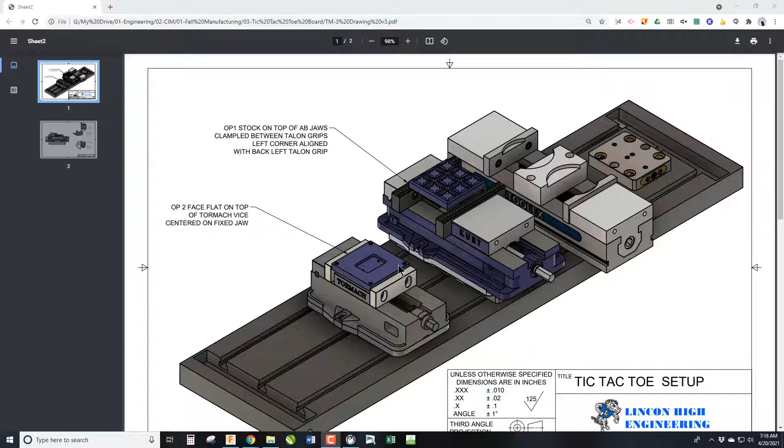Okay, to set up the tic-tac-toe board, you obviously need to model your tic-tac-toe board. You're going to need this file, found on Schoology, which tells you the important information about how to place the board on the vises.

And then, of course, you're going to need this file, also on Schoology, for you to download and import into Fusion so that you can then place your tic-tac-toe board into the two vises, the Kurt and the Tormach vises. So let's get started.

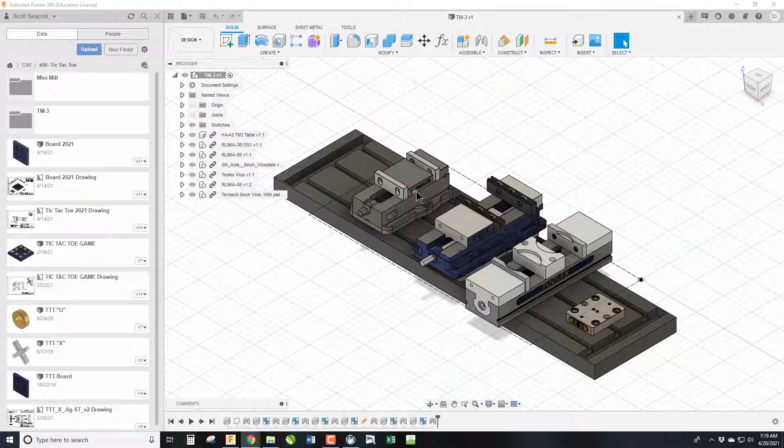Let's get started. So this is a model of the TM3, the Haas. This is a model of our Haas TM3's table with all the vises that we normally keep on it for all the projects that we do.

So we are going to put our model into this assembly and then do all the CAM programming for Op1, which will happen on the Kurt vise, and Op2, which will happen on the Tormach vise.

So you're going to need to download this off Schoology and then upload it into Fusion, and it should come all put together. You are going to want to create its own folder, because if you open this up, there is a whole bunch of separate parts, and you don't want that to clutter up your tic-tac-toe folder.

So I would create its own separate folder, and then you can go into this folder and you can open the one that says TM3.

And then now we're going to go ahead and just right-click on the board. This is the most current board, and I'm going to place it into the model, and I'm going to click OK.

My board has all the X's, all the O's, and the feet, but I've turned all those off so that we're only working with this.

So the very first thing we need to do is essentially join it to the vises. We're going to have to ultimately make a copy of it because we're going to need one for Op1 and one for Op2.

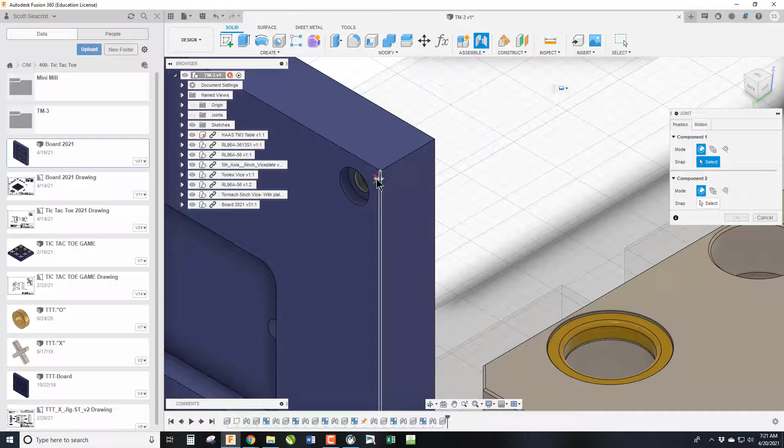So we're going to first go on the keyboard here, J for joint, and I am going to select the bottom back corner of the board. And then I'm going to select the outer edge, top edge of the jaw that we're going to mount it on. Op1 is done on the Kurt vise.

When we actually set it up in the machine, this talon grip will become flush with the side of the vise. So we need to offset this up and to the left, and we also have to go, I guess we should...

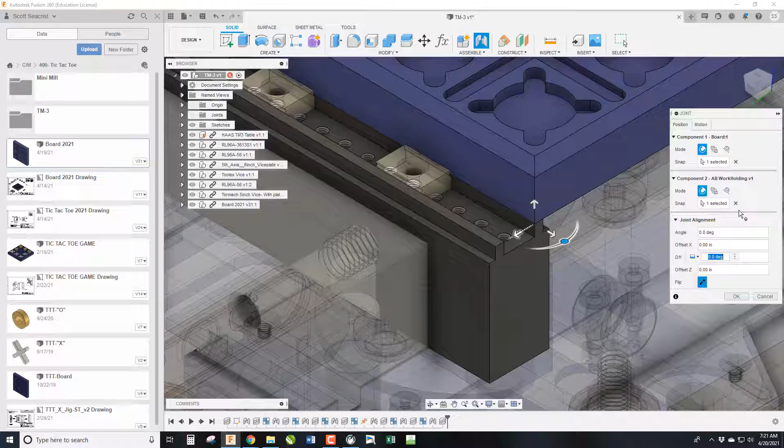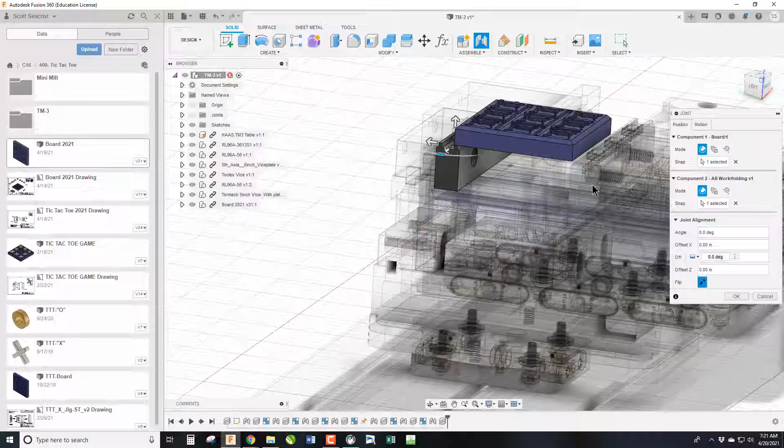So this is going to offset both down in Y, to the positive in X, and it's going to have to come up in Z. And all this data that you're going to need is found on this sheet here.

So if this is Op1 here, it's going to be 0.06 back from the corner, 0.18 up, and then we have a 1.378 from the left-hand side.

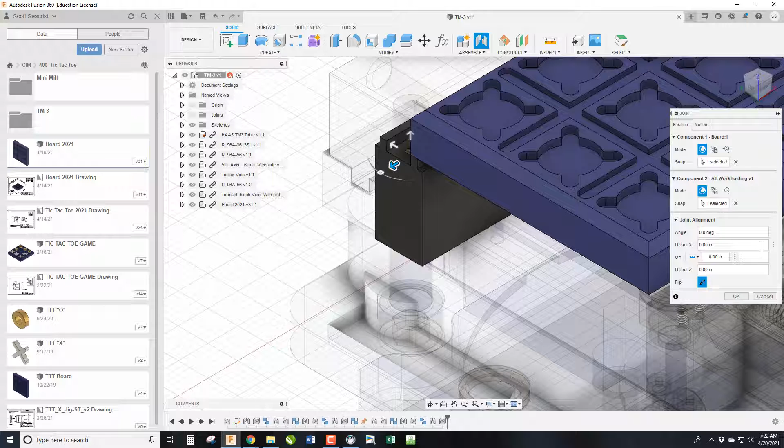So let's go ahead and do that. It's going to be negative 1.3. For this one it's going to be negative 1.378, and then the up one is going to be 0.18, and then this one will be negative 0.06. And I know the negatives because the arrow is pointing away from it.

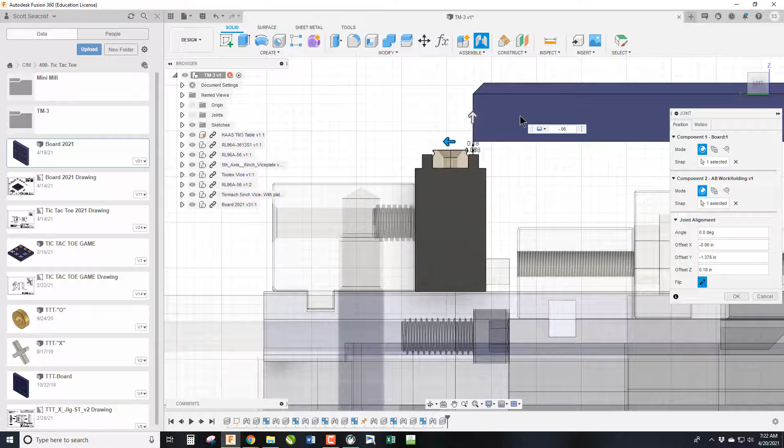And if we look closely, we can see that there's now a gap. And what this will do when we get to the next step of the setup is the 1-inch stock should then be resting right on top of these little edges.

So we're going to go ahead and click OK. I'm going to go ahead and hit Control Copy and Control Paste, which now means there are two boards right over the top of each other. And oh no, they're not right over the top of each other. My mistake, one's over here.

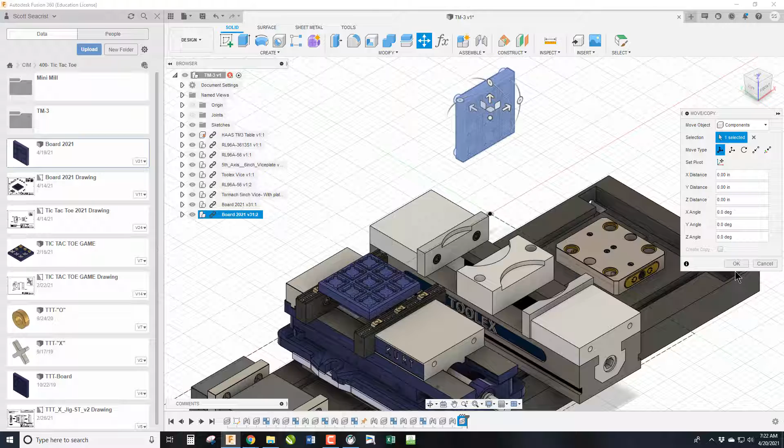That's perfect. And then we're going to go J for joint, and we need to kind of flip around to the back side to make sure we get the pocket in the correct spot, which we do.

And I am going to select the top edge, well, what will be the bottom edge, which will become the top for this. And then I am going to select the front of the vise here.

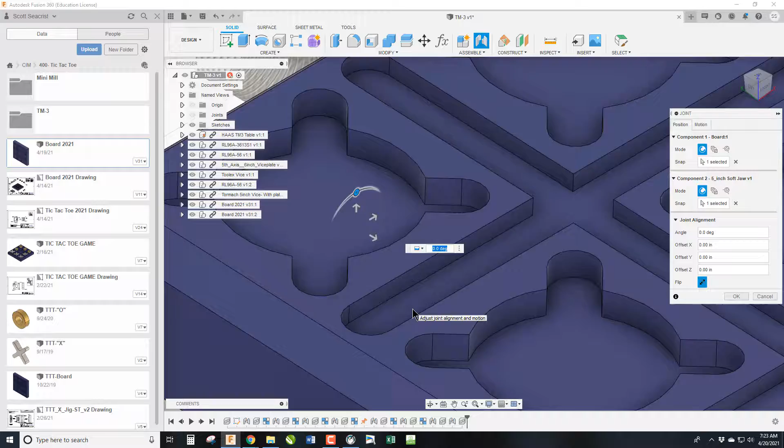And we're going to hit a flip. Oh, nope, not a flip, my mistake. We're going to rotate it 180 degrees.

Now, that's obviously not where we want it. If we go back to the drawing, Op2 is down here, and it's saying from the top edge here, it's 0.29 up. And...

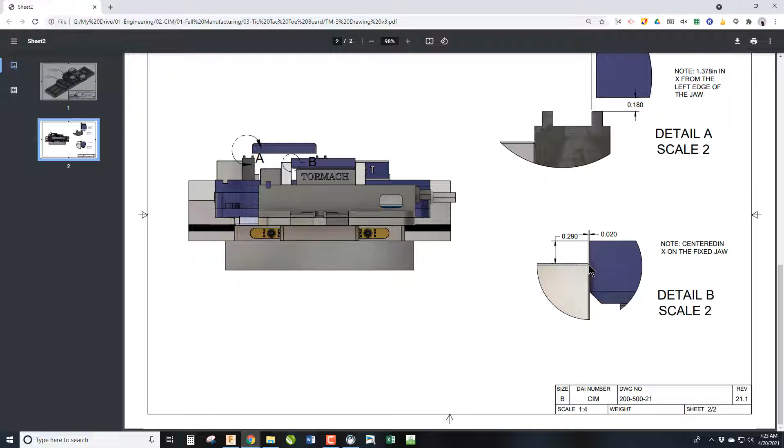Okay, I did this wrong. So here's our board, once we pasted it, it came over here. We're going to go J for joint.

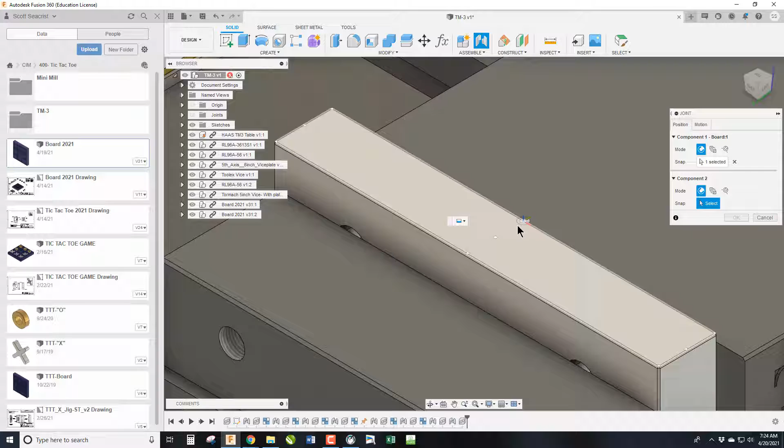And the best way to do this is we are going to select this surface, center of the back, or the bottom, I'm sorry. And then we're going to select the top of this and bring those together. We're going to hit a flip, and then we're going to rotate it 180 degrees.

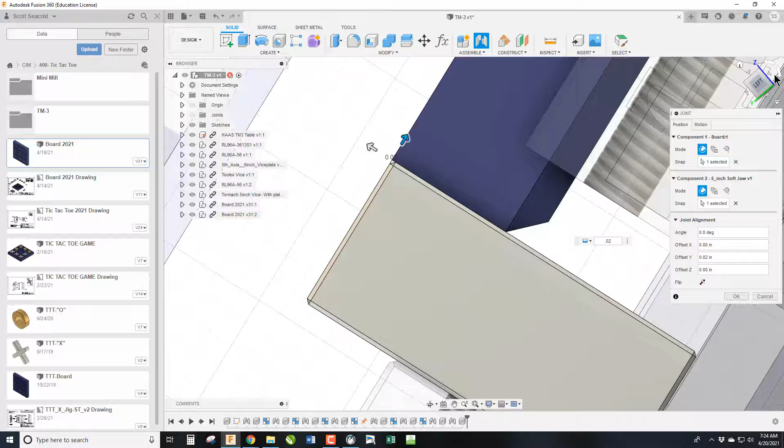Now, we need to move it 0.02 so that it will align with the actual jaw, overcoming the chamfer. And then we are going to rotate this, and you notice we have a big gap here because it's actually sitting inside the movable jaw, but it's 0.29, and that'll produce a perfectly flush movement.

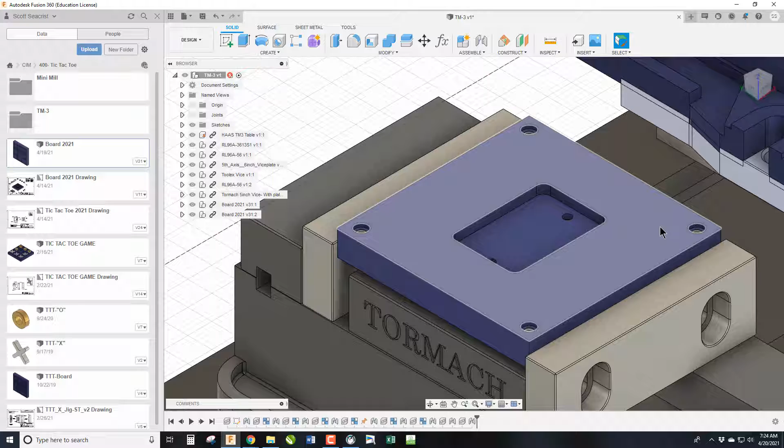And then when we set it up, we're going to make sure that the board is flush on each side, left and right, when we put it together in the actual jaw. So now we have both Op1 and Op2 placed on our model.

So now we need to do a setup. So we're going to hit save so we don't lose this.

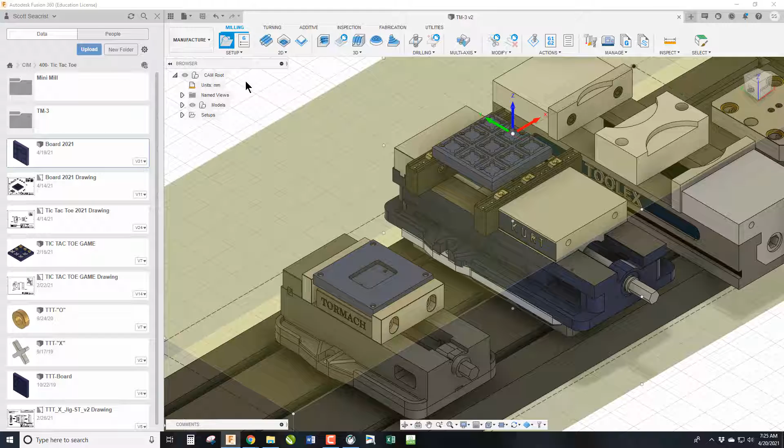And then we're going to go to design, manufacturing, and we're going to do our first setup. So it's going to want to grab the whole thing, which is not what we want. We want it to just be one piece, so we're going to click on model, and we're only going to select it one of two ways. We can open this design tree and then just select the one board we're going to use. Oh, shoot. Okay.

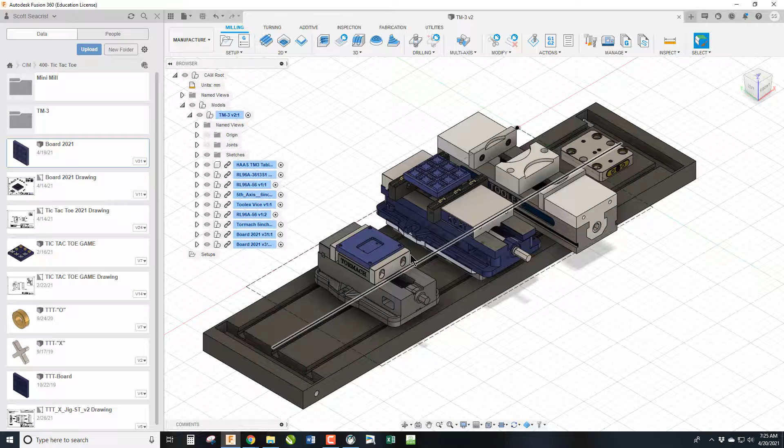Okay, so we now have imported the model, but what we have to understand is all these parts are actually all present. And if I move just the board, the O's and the X's will stay behind, which will cause us a downstream problem when we start to do the setup to actually do the manufacturing. So the first thing I need to do is make this board what's called a rigid group, which means all the parts will move together, even though I have some of them turned off.

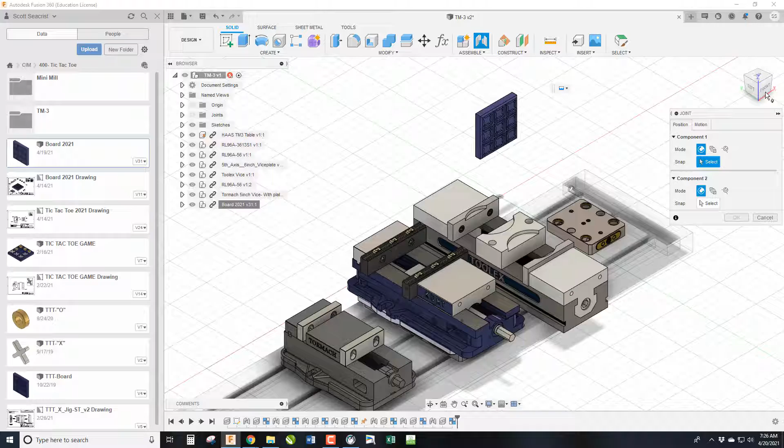So I went ahead and made this a rigid group. I can now go J for joint, and I am going to grab the bottom corner, outside corner, and I'm going to set it on top of this outside corner. Now, that's not what we want.

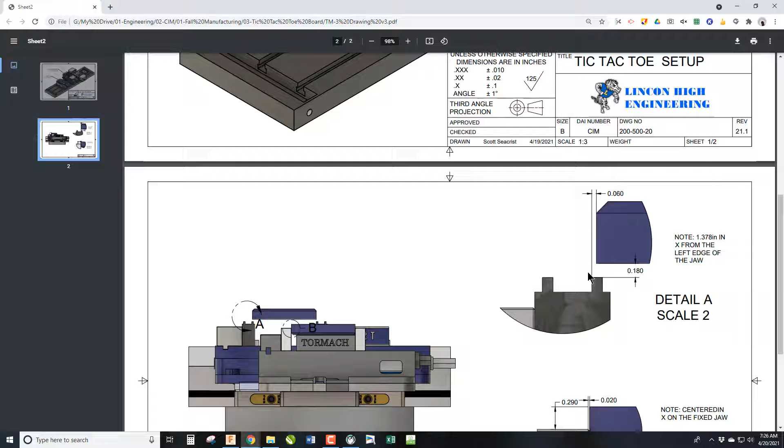If we flip over to the drawing, it tells us some details here at the top: it's 1.378 offset from the left side of the jaw, it's up 0.18, and it's offset back 0.06. So if we come over here, we can do those, because the arrow is pointing the opposite direction I want. It's a negative 0.06 for me, negative 1.378, and then it is a 0.18.

And that will account for, which we'll show in a few minutes, the stock being placed in there as well.

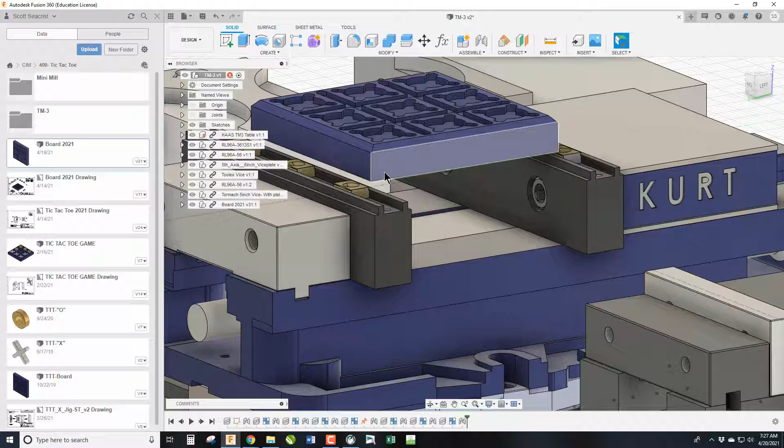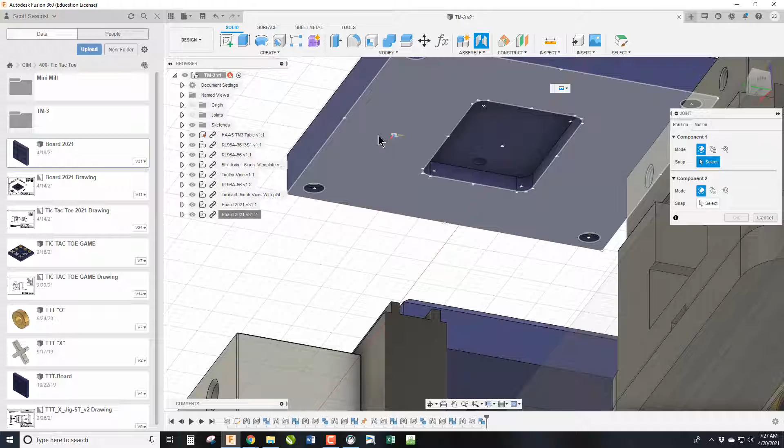So the next step we're going to do is Control Copy, Control Paste, and now we have two of them. We're going to move that one up. Once again, we need to do a rigid group here to make sure we move all the X's and O's with us. And then we are going to go J for joint, and in this case we are going to choose the bottom here and the top of this there. There we go.

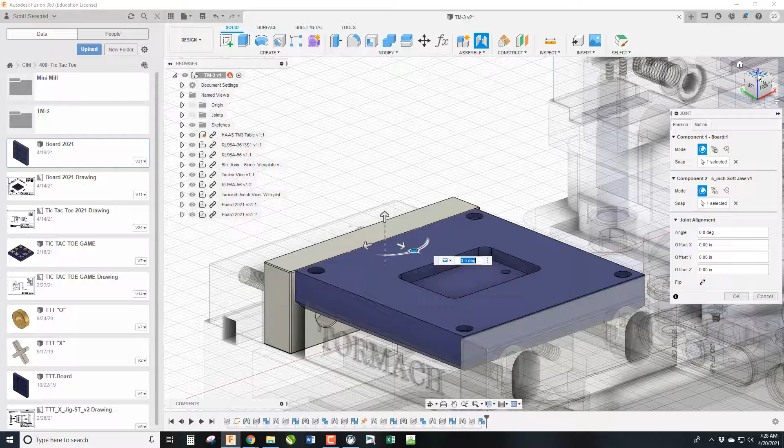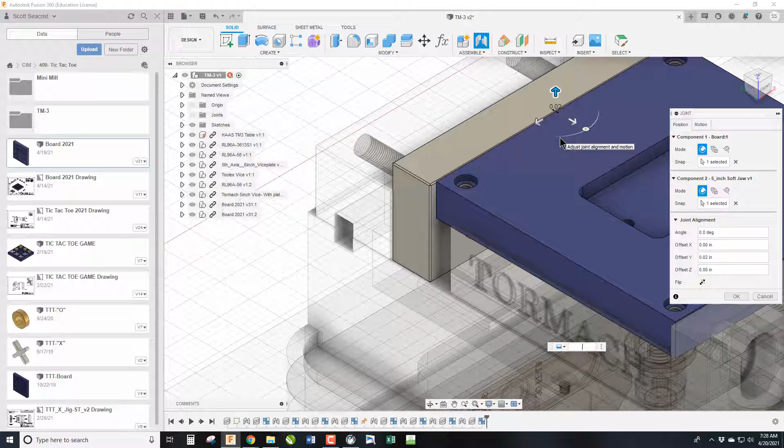Now we're going to flip this over and rotate it 180 degrees to get it into the position we want. Now we need to account for the fact that there is a chamfer on this soft jaw, so the first thing we're going to account for is a 0.02 chamfer, which overcomes that. And then the next thing we got to do is bring it up. In this case, we're getting this information from the drawing down here, and we are going to go 0.29 up, and if we then look from the side, it's perfectly flush.

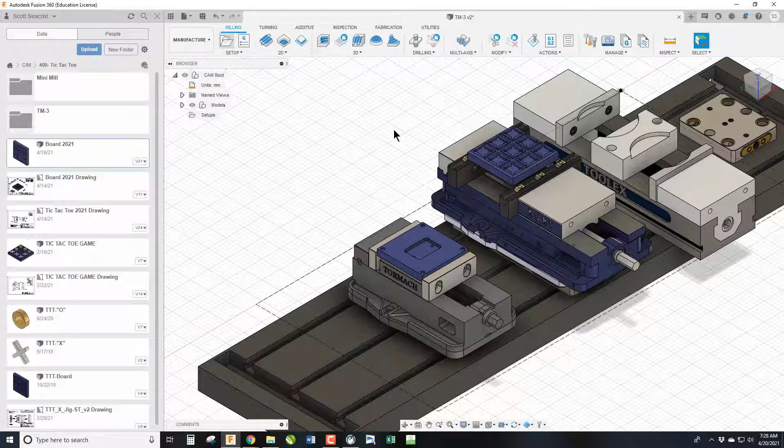And there we go. So now that we have both models placed properly, the next thing we're going to do is go over to the manufacturing side. We are going to go setup, and it's going to try to do a setup for the whole part, which is not what we want. So the first thing we're going to choose is just that one piece, and then our orientation is actually correct.

And then we're going to go to stock, and it is a fixed size stock. And for some reason I'm in millimeters, which I don't know why inches isn't set as default, but there it is. So we got to go back to setup again.

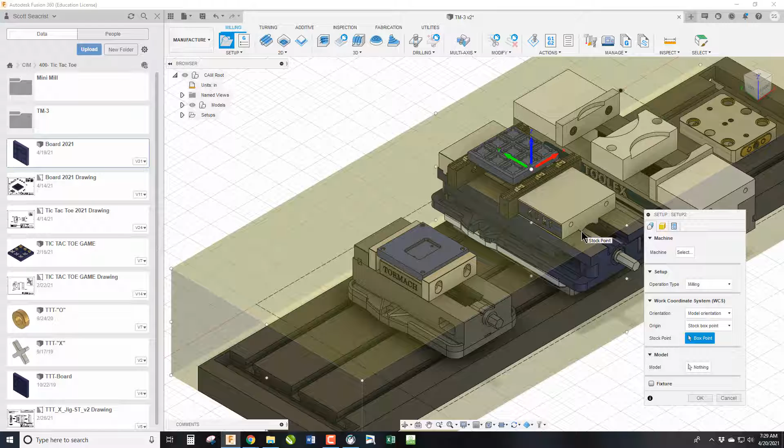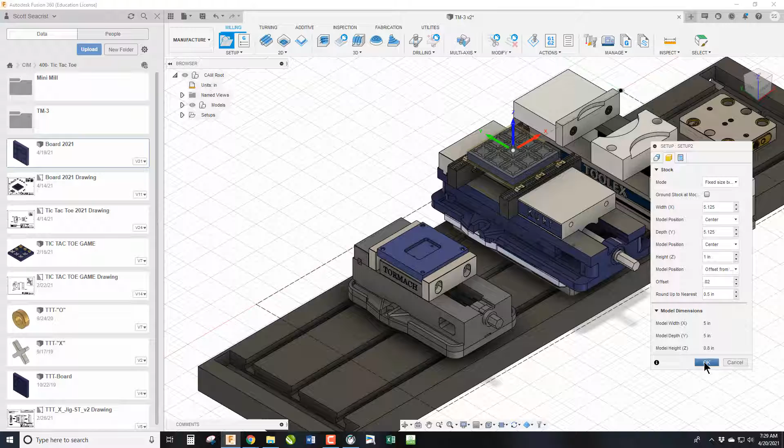I am going to choose this only. I am going to choose a fixed size stock. It is 5.125 by 5.125 by 1, but it's going to be offset from the top by 0.02. And if we then click OK and zoom in, you'll notice that the stock is now riding where it would be, and our part is in the perfectly correct location. So we have that setup done.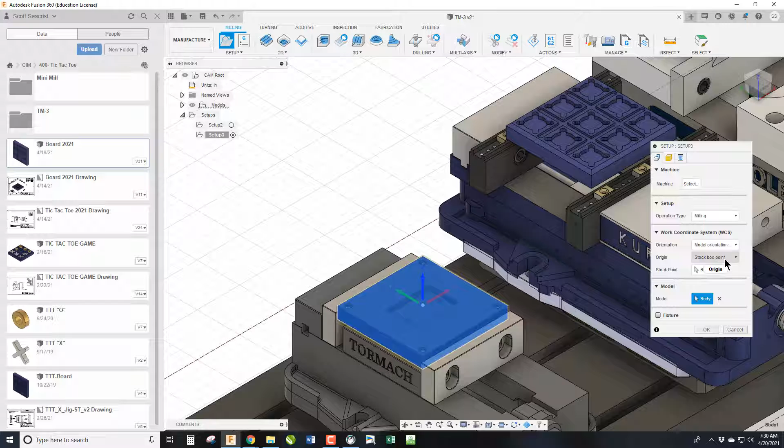We are now going to go over and do another setup, setup 2 in my case, for this op 2. And once again we are going to choose the body. The point is now different, so the stock, it's not a stock point, it's going to be a model point, and it should be the model origin — we are going to do a model point, and we are going to choose the bottom center of our piece.

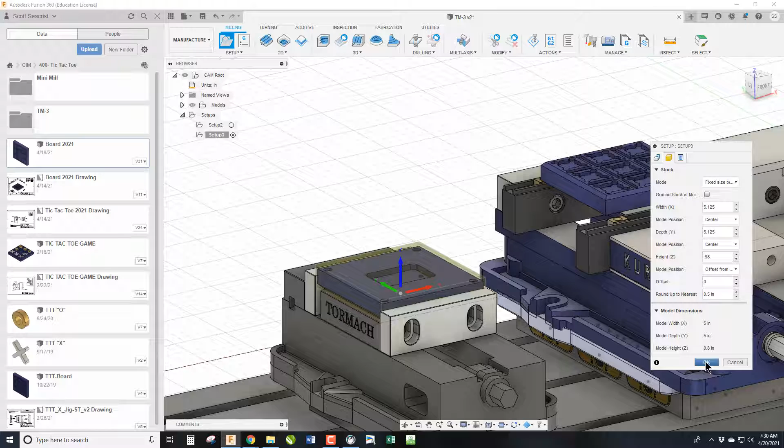Remember, op 1 we always set it on the stock, op 2 we always set it on the model, so that's where we want it. If we come over here, it is a fixed size box again, and it is 5.125 by 5.125 by 0.98, because remember we shaved off 0.02 on op 1, and we are not doing the center, we are offsetting from the bottom 0 amount. And we click OK. So now if we look at the stock on op 2, you'll notice it sits right on the bottom, and it's sitting up where we want it to be.

So now we could then program op 1 and op 2 in Fusion, which I'll do in the next videos, and we can cut the part.